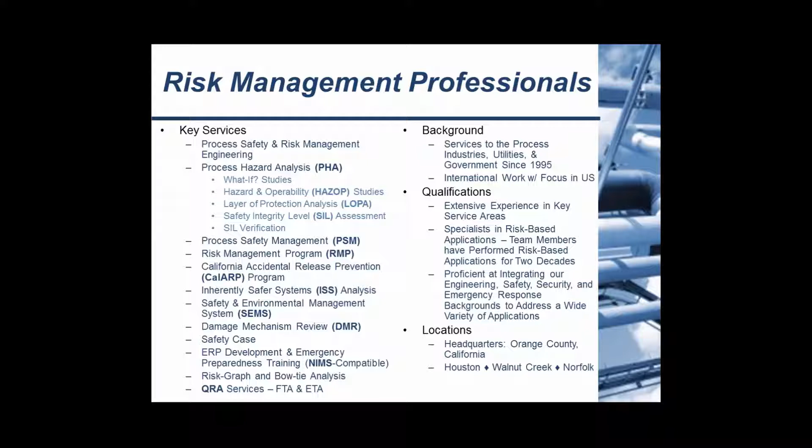Our key topics today are to discuss briefly the Program 3 element overlap, any periodic requirements that are typically required in Program 3 programs. We'll discuss the common program deficiencies that we've observed here at Risk Management Professionals that were listed in the EPA enforcement alert recently, and summarize some of the revised CalARP regulations that became effective at the beginning of the year.

If you're not aware of these changes, you could be deficient already just based on the fact that they went into effect through the year. So it is important that we listed these as potential deficiencies in this webinar. I'll also go over a regulatory update with the current status of where everything is to our knowledge, any potential changes that we foresee, just discussing with our contacts at the federal and state agencies, and any suggested facility actions for those facilities who may be concerned with what the future regulations

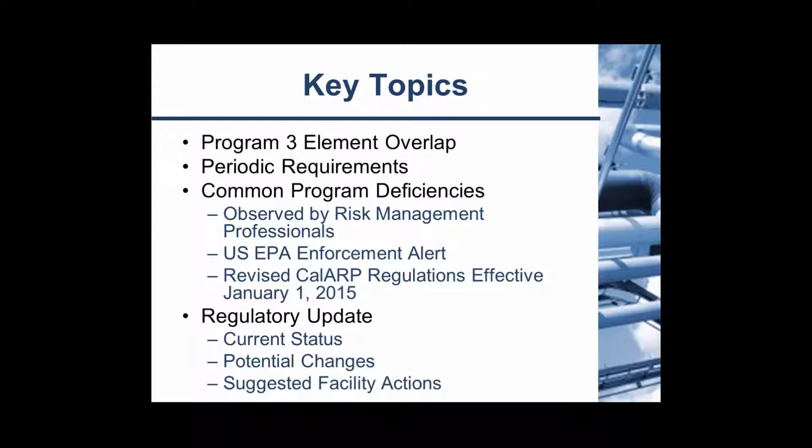hold. This slide presents the prevention program overlap. As you can see, we have 2 federal and 2 state for California programs that have regulations that overlap quite extensively. We'll discuss the more conservative regulations in California for the most part. However, with the general duty clause at the federal level, it is very likely that these would be required at the federal level as well, which is why we always cover everything.

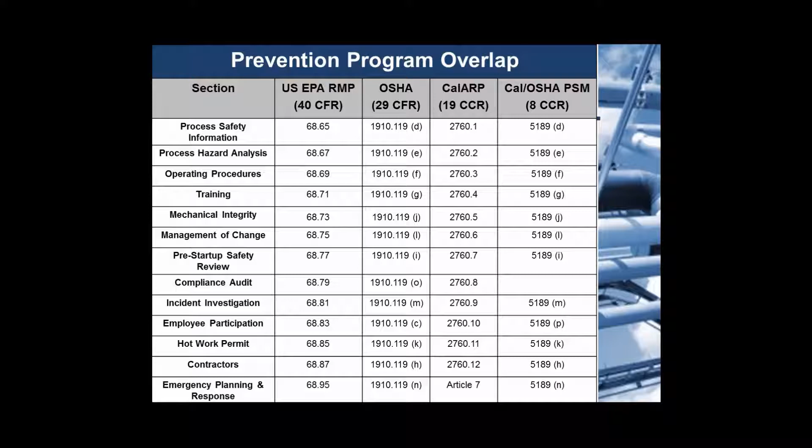For periodic requirements, there are obviously ongoing requirements whenever there's a process change. There are also annual review and update requirements for operating procedures and emergency plans. Those include the emergency action plan and the emergency response plan, depending on your facility's response measures. There's also the triennial or 3-year updates or audits, and those include the compliance audit and also refresher training for your personnel at the facility.

Every 5 years, in regulations, you're required to submit a CalARP or RMP submittal, sometimes both if you're in California. There's also the hazard assessment, or otherwise known as the off-site consequence analysis, and the process hazard analysis, or if you're a Program 2, would be the hazard review. And again, we're going to be talking about Program 3 elements today, and the seismic assessment in California.

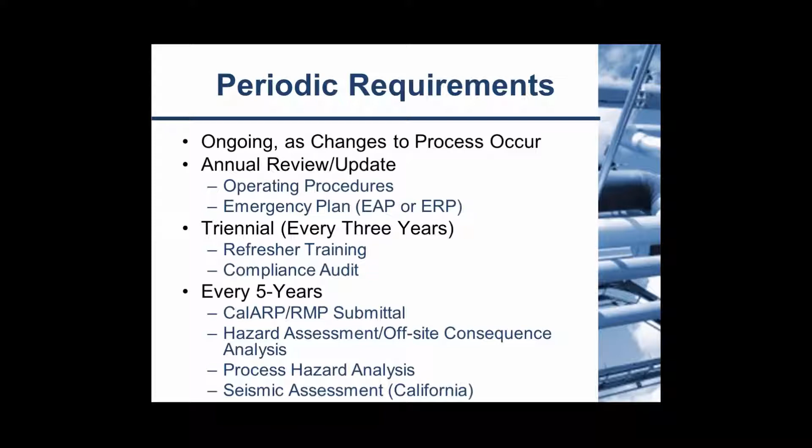So we'll move on to our common program deficiencies, and they're specific to ammonia refrigeration. Again, this list is going to include those observed by us here at Risk Management Professionals, those listed in the U.S. EPA enforcement alert that was published for February of this year, so this month, and those revised regulations that went into effect in California on January 1st.

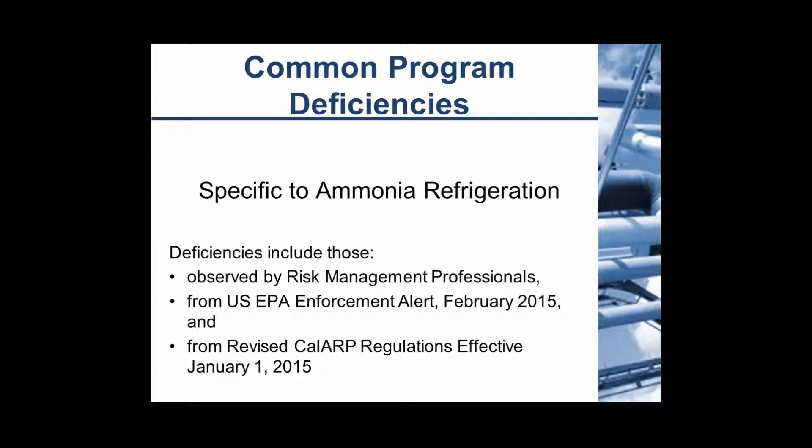So for the CalARP RMP submittal, we typically see that the submittal is either not completed or not submitted to the agency in a timely manner. And by that, we mean that it's not submitted on time by the anniversary date.

The management system is frequently not in place, and that's really important, especially if you have frequent changes to management or to personnel. There needs to be a new submittal for each change. Those changes are considered administrative changes, so they will not reflect back on your anniversary date. That will not change when you make an administrative change. However, you do need to update more frequently if you have more frequent personnel changes.

And that's important to note. The emergency responders and the EPA, OSHA, they all use this information to have facility contacts and to also know what the facility is doing. And if your information is not up to date, they won't be contacting the right person if there's any issues or concerns with the data that's submitted.

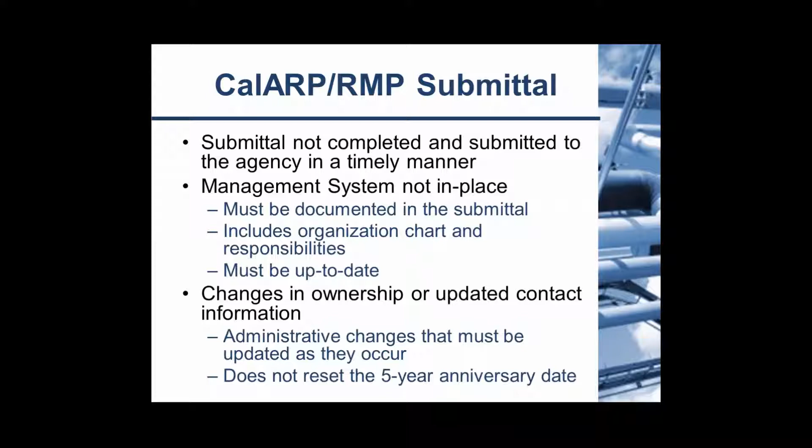For the hazard assessment, we typically see this description of the alternative release scenario that's not present. When it is present, you always need to ensure that both the worst case and alternative case scenarios meet the requirements listed in sections 2750.3 and 2750.4 of the CalARP regulations.

There's also the revalidation for the hazard assessment. Most commonly, there's a failure to update the population based on the most recent census information, which currently is the 2010 census. We also see that in California, especially the LA and Orange County region, the list of sensitive receptors and a map will not be included with the submittals, and that's really important for the region. They like to have phone numbers to call in an emergency if there's evacuation orders, to be able to warn the public. A map helps indicate who's closest to the facility and what kind of facilities are involved.

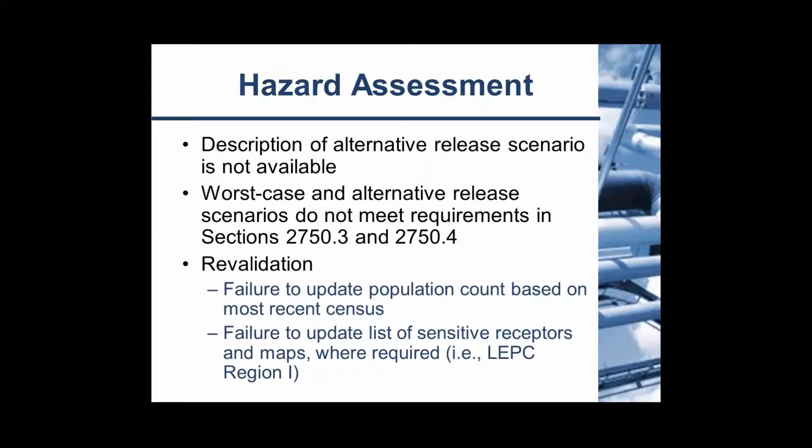For the process safety information, P&IDs are very important. If they're missing or don't reflect changes in the process, it can be very difficult to figure out what's going on at the facility. It's very important to have these updated. They also need to be updated for each PHA. So at a very minimum, even if you're not reviewing them annually like recommended and required, you should be reviewing and changing them as necessary on a 5-year cycle for the PHAs. That's something we see frequently with risk management professionals. It can be very difficult for facilities, especially with older P&IDs, but this is really important to have put together, especially if there's emergency or other hazards at the facility.

With process safety information, especially during compliance audits, we see a lack of documentation, and you'll hear this a lot this morning about documentation. It's all about documentation. Make sure that you have relief system design information in your PSI section. Make sure that you're in compliance with RAGAGEP, the Recognized and Generally Accepted Good Engineering Practices. If it's best practice in the industry, you should be doing it, even if it's not explicitly required by the regulation - it's implied by the general duty clause. You need to be paying attention to that. Make sure that the electrical area classifications and distribution system information is all listed, that chemical reactivity hazards are covered, and if any codes and standards were used during design, that those are listed as well.

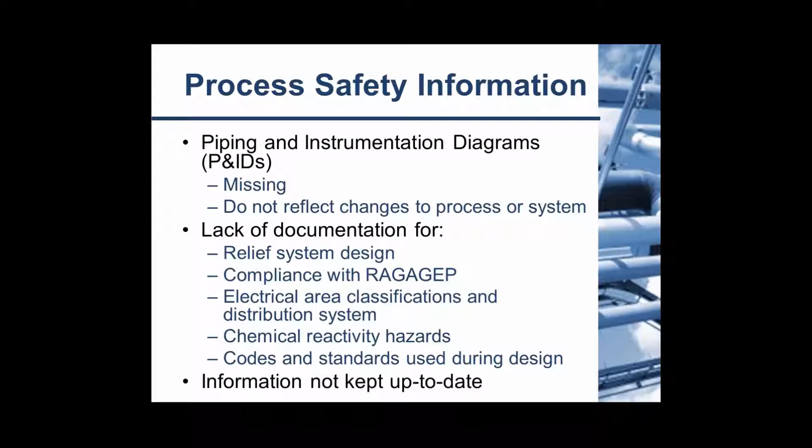For the process hazard analysis, the PHA should be conducted by a knowledgeable person in the process, or at least that person should be involved. Sometimes that's multiple people, but a knowledgeable person needs to be present who has knowledge of the hazards of the facility, possibly someone who's worked there for several years and understands the ins and outs of the operations.

You need to make sure that you're identifying your hazards properly, that there's an understanding between the codes used during design and the codes currently in place. If there's any updates or upgrades that need to be done to the system, those need to be considered and followed through with in recommendations.

You need to know the location of your emergency shut-off and evaluate that. If your emergency shut-off location is in a maintenance room, a mechanical room, or operations area, it could be in a hazardous atmosphere. If it's in the same room as, say, your ammonia tank, that could be a potential hazard, especially if you don't have people trained to go into a hazardous atmosphere. It's really important to consider installing an emergency shutoff outside of that area, possibly on your way out the door in an evacuation.

We've seen a few facilities starting to do that. I think that's becoming more common practice for the safety of their employees and reducing their liability in case there is an emergency. Also, ensure that the pressure relief devices are located where ammonia is not going to be sprayed or come in contact with people trying to evacuate or respond to an emergency. Those should all be located out of the way, possibly outside the building if you're in a building.

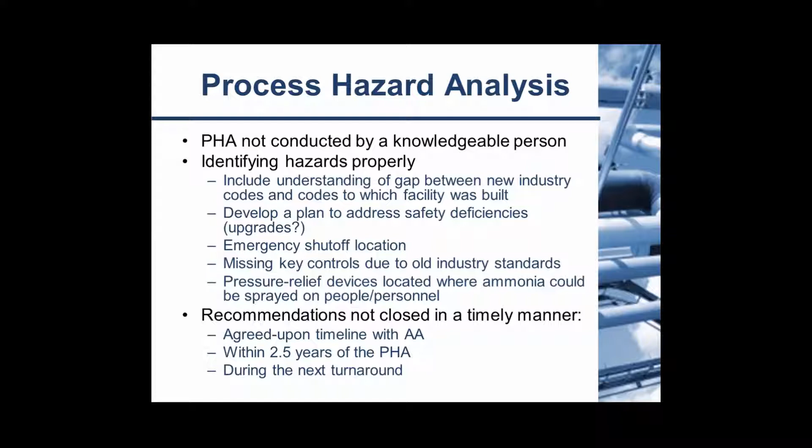Continuing on with the PHA, we sometimes see a lack of documentation for closed recommendations. Again, going back to the documentation aspect of this, if it's not in writing and it's not on file, it doesn't count whether you did it or not. It's really important to remember that. You can say you did something all you want, but if you don't have a piece of paper to prove it, the regulatory agencies are not going to accept it. So you need to keep these recommendations, whether closed or not, on file for the life of the process.

They also must include a completion date. We highly recommend also including a person who's responsible for the completion, someone who's going to follow up with the changes or upgrades that are being made.

Frequently we see that the 5-year update is not completed by the anniversary date. That's typically a scheduling issue, and it's really important to remember, especially if you use an outside consultant, that it could take up to 3 months or more to get something like this scheduled. You've got a team of people you have to get together, and everyone's busy, obviously, especially in operations. It's really important to keep in mind that just because it's due next week does not mean you could get it done by next week.

Maybe because of scheduling, maybe availability, you could have technical problems. You may need somebody, the owner, who's out of town that week and they need to be present. So you need to keep all of this in mind, and it's very frequently much easier to just plan ahead and complete it before the anniversary date, even up to a month before, and schedule it early. Then you move up your anniversary date by a little bit for the next cycle, but it's not really hurting anything and you're done on time.

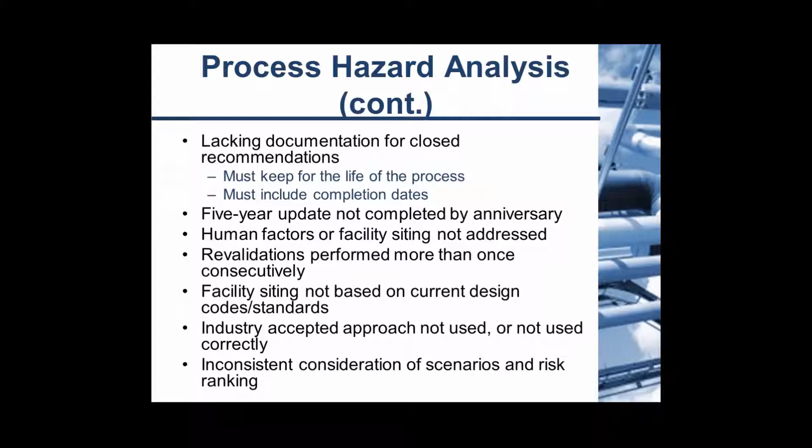Facility siting, when conducted, should be based on current design specifications and standards. You don't want to be using old codes and standards. Everything should be current to current building code or best practice through the relevant agencies. I know API releases bulletins, and there are a few other agencies out there that also give guidance on that. Also, a generally accepted, industry-accepted approach should be used, and it should be used correctly. There should be a consistent consideration between scenarios and risk ranking throughout the entire PHA for the facility.

Moving on to operating procedures. Operating procedures should not be outdated, and an annual review should be performed. This is frequently documented with a simple sign-off sheet. If there are no changes, that's great, but you still need to prove that you reviewed them annually. So something like a sheet in the same binder or on your computer, where whoever's in charge signs off saying, yes, I reviewed it on March 1st, 2015, means you're doing it and you have a piece of paper to document that.

Again, we're going back to documentation, everything needs to be written down and proven. These operating procedures also need to be synchronized with what's going on in the field with the operators. Each phase of operation should be covered, including temporary operations if there are any. Emergency shutdown job procedures should be very clear. If there are certain people responsible for different tasks, they need to be laid out very clearly in the operating procedure as well as in your emergency plan.

Acceptable alarm set point ranges should be indicated very clearly. We frequently see that missing from the documentation. Procedures should be in the language of the user. So if you have personnel that do not speak English, they need to be in that other language for them to use. This is very important - if their first language is Spanish, even if they understand English, if they can't understand the operating procedures in English, they need to be translated to Spanish. This is required by the regulation. Consequences of deviation are frequently not included in these operating procedures, and they should be on each procedure. Safe work practices should always be followed.

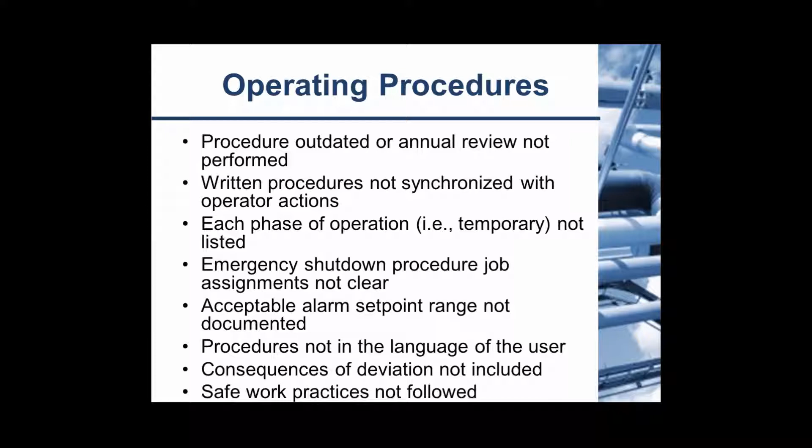For training, we frequently see that training documentation is not on file, and that doesn't mean it wasn't done, but again, we're going back to being able to prove that you did it. It could be a simple certificate or sign-in sheet from a training, quizzes that were taken, or an evaluation sheet that was done to evaluate the performance of that operator, but something needs to be kept on file that the training was conducted and how it was conducted.

It needs to cover maintenance procedures. Even if you go to an outside contractor for maintenance, there are still going to be some basic procedures for the operators to assist the maintenance personnel. It may be that they're turning valves, or just supervising, but there should be a procedure and training in place for all of that, no matter how simple it may be. Records need to verify that operators understand these procedures - going back to quizzes, oral verification or discussion and sign off, or field observation, something to verify that the operator has understood the training they've been given, and that they know what to do in the situations they've been trained for, whether emergency, regular operations,

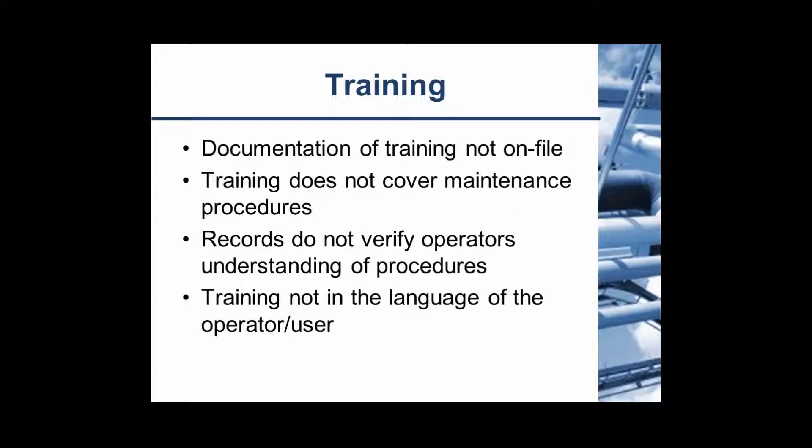temporary operations, whatnot. Again, the training needs to be in the language of the operator or user. So if you have someone with English as a second language, even if they speak English and understand it pretty well, if they don't understand their training in English, it needs to be provided in that other language. For mechanical integrity, written procedures need to be available, complete, and implemented.

We frequently see that it's not, and this goes for even when you use contractors for maintenance activities. Inspection and maintenance should be performed and documented. They need to be standardized and consistent with industry standards. Frequently in the EPA enforcement alert, they've noted pipe corrosion issues and pipe security not being addressed. They've also indicated that ice buildup has not been addressed in these maintenance procedures. So these are things to keep in mind - if you don't have procedures, or your maintenance contractor doesn't have procedures, they need to be documented.

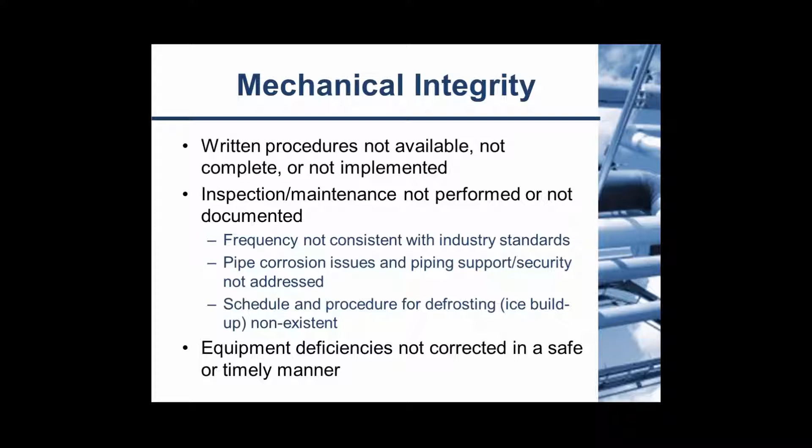Equipment deficiencies should be corrected in a safe and timely manner. If there's an upgrade that needs to be done, a process that needs to be changed, all this needs to be done within a good timeframe. The maintenance needs to be scheduled with the contractor if that's who's doing it, and it needs to be on a schedule. Again, going back to documentation and follow through. Quality assurance should be in place. There should be some kind of third check or second check on all the work, and everything should be verified that it's been conducted appropriately.

There should be sufficient information available for piping and equipment hazards, and develop a maintenance program around those. If there are certain procedures that need to be done during maintenance, or certain supervision or awareness, all that should be documented in the procedure that's in place. The facility should also verify that you have adequate ventilation during operations and at any other time that may be necessary.

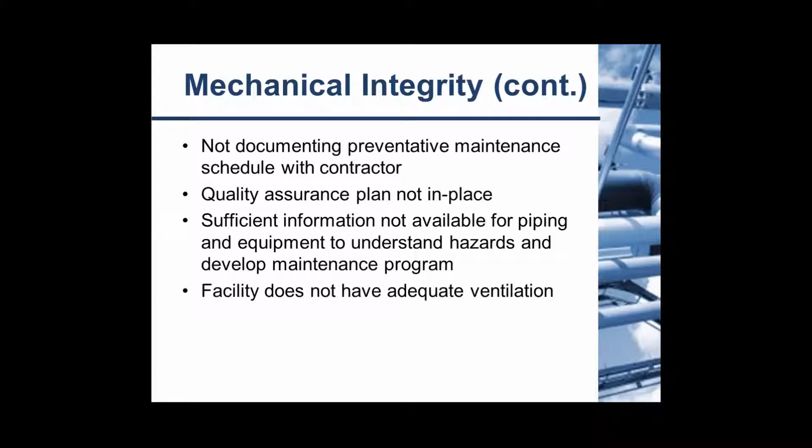For management of change, frequently this procedure is not even used. It's really important to remember that if there's any change to the process that's not a replacement in kind, you need to have a procedure documented and in practice and used. The prevention program may lead to prevention program changes and documentation changes. Again, if it's not written down and you don't document what you've done, it doesn't count. So you could still be cited for things even if you've done them and you just don't have the paperwork.

Also, if there's any personnel that need to be notified of any changes, that all needs to happen. That ties into some of the other elements such as training, maintenance, and employee participation. So all that needs to be considered when you go through an MOC process. If there's a need for modification in the operating process or maintenance, that all needs to be addressed during this period as well. While the change is occurring or while you're proposing a change, what other changes to other elements will need to take place.

And the MOC procedure should be completed before startup. So this isn't something you do after the fact when you're all done. If you have already installed the new equipment or whatever it may be, it needs to be done before that, during the planning process. That's the intent of this element.

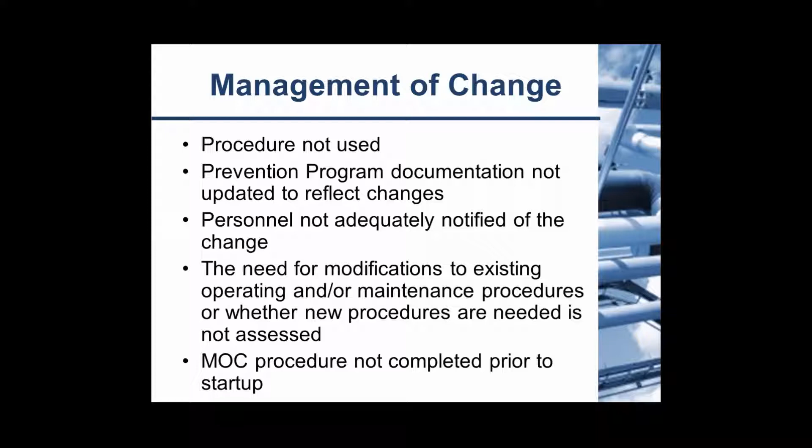The pre-startup safety review, again, the procedure is frequently not documented. There should be some kind of form or checklist or procedure in place to do the PSSR. Documentation needs to be kept on file, and when it's completed, it needs to be signed off on, and the implementation and follow-through needs to be documented.

It needs to be conducted prior to startup, but after and independent of the MOC. So this is supposed to be a back check, basic quality assurance check on the MOC process. Was everything done correctly? Was the equipment installed? Were procedures changed? Were the employees notified? Everything that needs to go into that. This is the final check before you start up the system again. It's really important to remember that and to document everything.

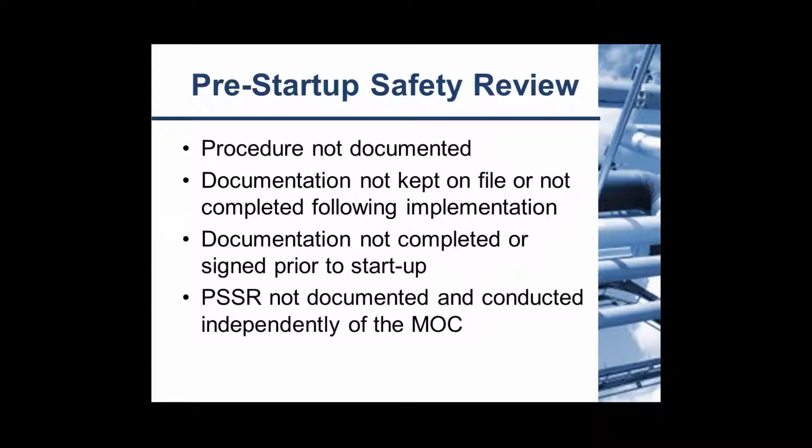For the compliance audit, recommendations now have a required timeline as well under the CalARP regulation, and frequently they are not corrected or completed on time. There's an agreed upon timeline with the administrative agency that's allowed, as well as the requirement to complete them 1.5 years following the compliance audit or during the next planned turnaround. All these apply to whatever occurs sooner. So it's important to keep that in mind, especially with changes that deal with safety.

You probably want to get them done sooner rather than later. The compliance audit should always be completed before the anniversary date. It doesn't necessarily mean the report would be completed by then, but the audit needs to be done by then, and it's implied in the regulations. However, you should really have everything done by the anniversary date if you can.

The documentation should include audit scope, methods, and findings, and this is new to the CalARP regulations. Previous to this, they only specified that findings had to be documented, and now they're requiring that you document and report the methodology that was used, how you did it, what was included. That's typical of our reports here at Risk Management Professionals, but not necessarily typical of all facilities. So it's important to remember that.

Program implementation should be verified with facility personnel. They should know where this documentation is for the entire program, and they should be able to review this compliance audit, especially, and know what the deficiencies may be. The recommendations should be documented and included in the report, and they need to be kept for the most recent 2 compliance audits at a minimum.

We highly recommend you keep them longer than that if you can, file them away somewhere, especially if it's just on your computer as an electronic file. But the most recent 2 compliance audits must be kept with the program documentation until the 3rd one or the next one would be conducted.

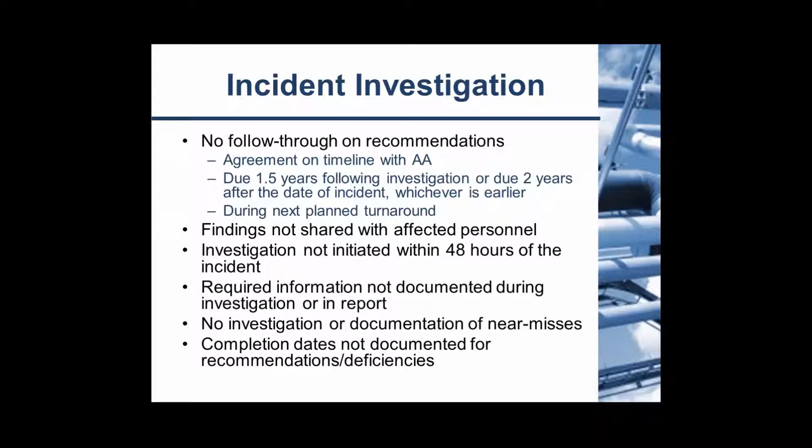For employee participation, frequently a written plan is not documented or not shared with personnel, and that goes for all these program elements. They should be fully aware of where this information is located at the facility or corporate-wide, and they should have full access to this. It's their right to have full access to their safety and what the company is doing for their safety and for operations.

Personnel involved with the process should always be aware of these programs and know where the documentation is. They should be involved with program development, especially the operators. They're frequently the people who know the most about how the system is working and any nuances. They're out in the field every day, so they know what may be underperforming—there may be a valve that's about to break, and they may be able to tell that and report back. So you want to involve them in this whole process. It's really important to get their input.

The documentation needs to be in the language of the operator or user. Going back to people who don't speak English fluently or as a first language, that all needs to be translated for them somehow, and it's really important to note that.

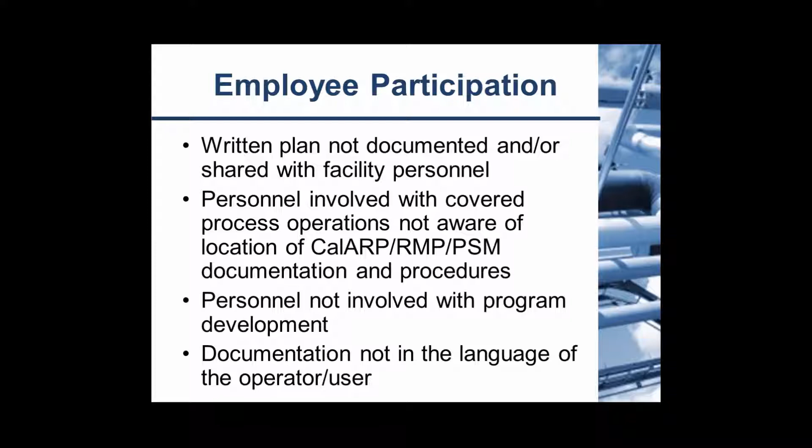For hot work permits, personnel should be trained and knowledgeable in the procedures, and they should be documented, with records always kept on file. I believe the best standard practice is to keep them on file for several years. I know a few facilities I work with directly will keep them on file for the life of the process, so it's implied that you need to keep them on file for a lengthy amount of time. It's really up to the discretion of the operator or management, but that may change as regulations develop over time. Also, the hot work area should be field verified by a supervisor.

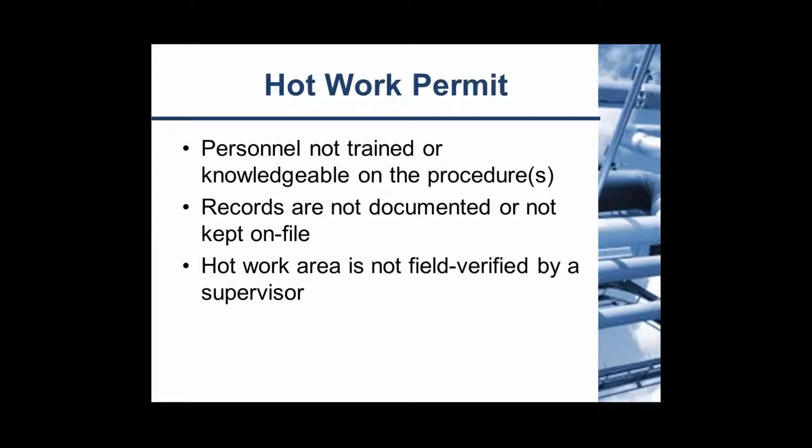For contractors, there should be documentation regarding their training, so any kind of training certificates, same as you would for your own employees, and keep those on file. It should be the same for the contractors. And it is the owner's or operator's responsibility to collect those documents.

So if the contractor's not offering them up, and let's just say they do annual training, you need to be asking for them. It's your responsibility to have those on file and to make sure that they're up to date. There's also frequently a lack of safety training. A lot of accidents happen because contractors or operators are not trained appropriately. So this is all part of the verification process and documentation.

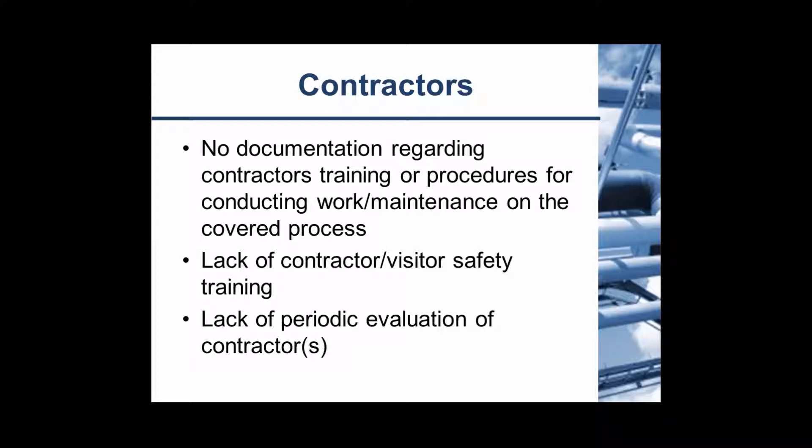And there's also a periodic evaluation of contractors that should occur. You should be evaluating them on their safe practices, field verification for checklists once a year. And if you have different contractors from the same company coming out, you should evaluate each one of them. And the contractor or the company may have their own method of doing that as well, and so it's always important to keep those lines of communication open. Emergency planning and response.

You should understand the difference between an emergency response plan and an emergency action plan. Although there's a slight difference between the two, there are some distinguishing documentation differences and requirements. So knowing the difference and having the correct plan in place are the first steps in meeting the requirements by any other agency.

So if you have any local agencies, a local fire department that require you to do more, do something different, you need to be talking with them as well because they may be assisting you with any kind of accident or emergency response, and you need to have open lines of communication with them. The contact information should always be up to date in these plans. If there's a personnel change, that should mean a change to emergency plan.

There's an annual review that should be done. Again, a real easy sign-off sheet that it was conducted, one of the attachments or whatnot. It's very effective to just document that you've reviewed it, there were changes, and they were made, or there were no changes. And also training on the emergency plan is really important.

If you have an evacuation plan but no one knows where to meet and evacuate to, it does nobody any good. So it's really important to train and to coordinate with local agencies, the local fire department, the local hazmat team, whoever it is that you need to be coordinating with. And that should be documented as well.

That is a new CalARP requirement to document the coordination between the groups. Again, it could be an email saying, hey, we're so glad you came over the other day or whatnot, and a little signed report or whatever it may be, but it does need to be in writing somewhere.

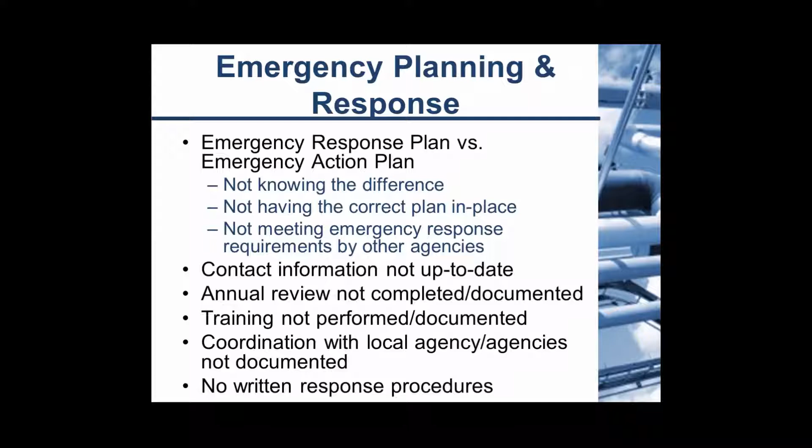So the most common program-wide deficiency that we saw here in the list was the recommendation follow-up. To elaborate on that, one of the easiest things to do is assign an individual for recommendation completion. And there should always be an anticipated date of completion that follows the regulatory compliance and also that's been verified with the administrative agency or with the local CUPA that they agree with the timeline of these anticipated dates. It's really important to make sure you're coordinating with your local agencies, with the people that will be responding to your facility, and with the people that are governing your facility.

Documentation should address recommendations when they are closed. They should be labeled as such and the date they were closed. And again, the responsible person or the individual should always be listed on that somewhere.

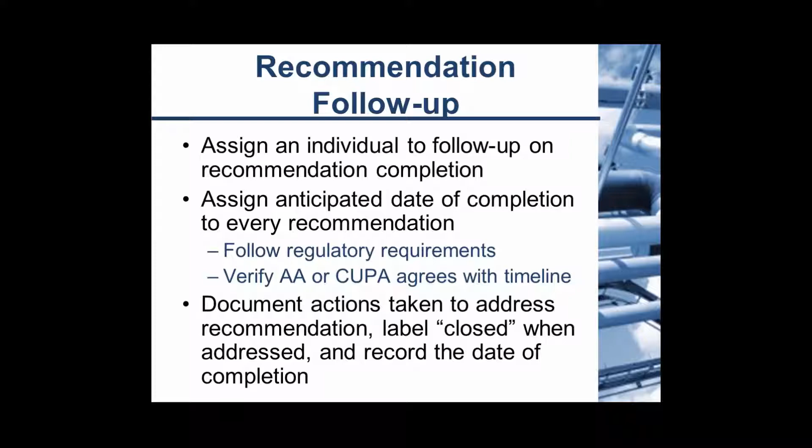And so the underlying theme here today was basically no documentation means that there's a deficiency. If it's not in writing, I always think of it as, if it was a legal matter, if it's not in writing, it doesn't count. You need to be able to defend with concrete evidence that you've been doing what you're supposed to be doing according to regulations. Even if that's a little bit of an overload of paperwork, or you print out an extra email that was sent, or you have to write up a memo and put that in the file.

That little bit of extra effort will save you a lot of effort later when an agency comes to your site, your facility, and asks for your documentation. If you're missing it, you start seeing citations, or they offer recommendations, and you've got to go back and do it again, going backwards in time to remember what happened and reproduce the document. So it's always easier to do it in the time and in the fact rather than after the fact.

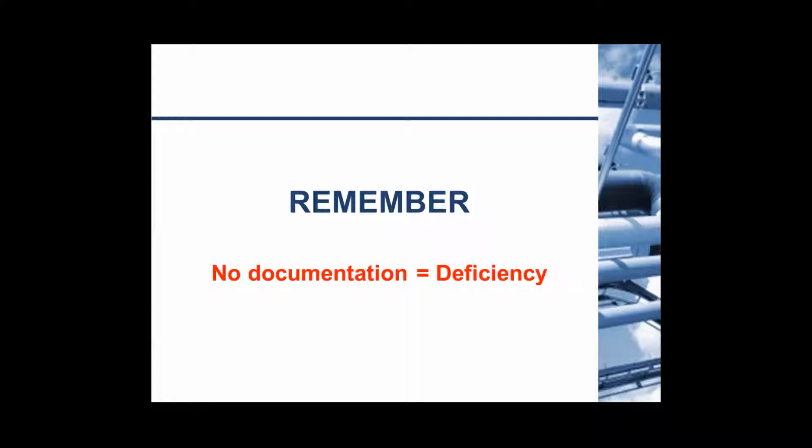So we'll go ahead and talk about the regulatory updates that are occurring federally and statewide in California. Right now, the current modernization efforts include 6 agencies that are all working together. Some, as you can see from the diagram, are federal, some are state agencies. Some are just the interagency working group and the chemical safety board, which are kind of outside of that as almost private agencies, even though they do have public influence.

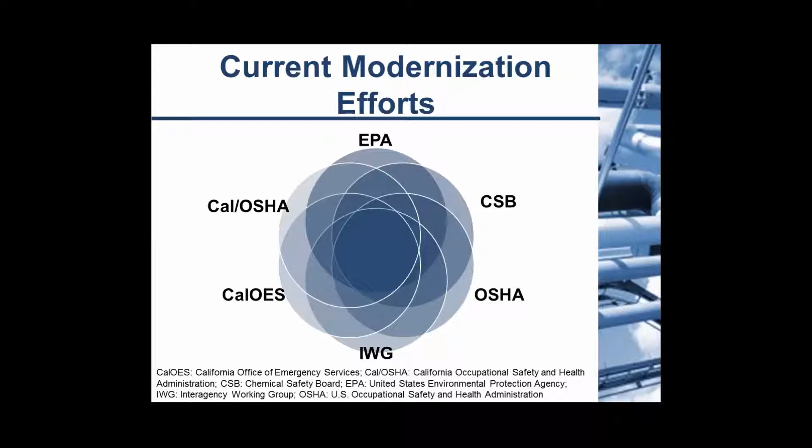So right now with the agencies, the CSB just had a hearing on January 28th. The final report was voted on unanimously and published. It had key findings that were both previously listed in the draft as well as new findings that were not. So I encourage everyone to read or at least skim this if they have the time to do so.

The interagency working group still has meetings that are continuing. There are no additional reports planned for the agency, but that could always change. And the U.S. EPA and the federal OSHA have both received all their RFI comments. They've been closed, and they're still reviewing and producing a draft report on them.

So as far as the regulations go, right now we're looking at 3 initiatives between OSHA, EPA, and CalOSHA. OSHA has 3 independent initiatives, EPA has 9 independent initiatives, and CalOSHA has 12 independent initiatives. And what this means is that those initiatives do not overlap with any of the other 2 programs or agencies and what they want done.

So for PSM, there are potentially 15 more initiatives or elements that could require facilities to meet, as well as 9 EPA or RMP requirements. For the CalOSHA PSM, basically what they're doing is they're setting up a new regulation. It'll be 8 CCR 5189.1 for highly hazardous materials and petroleum facilities.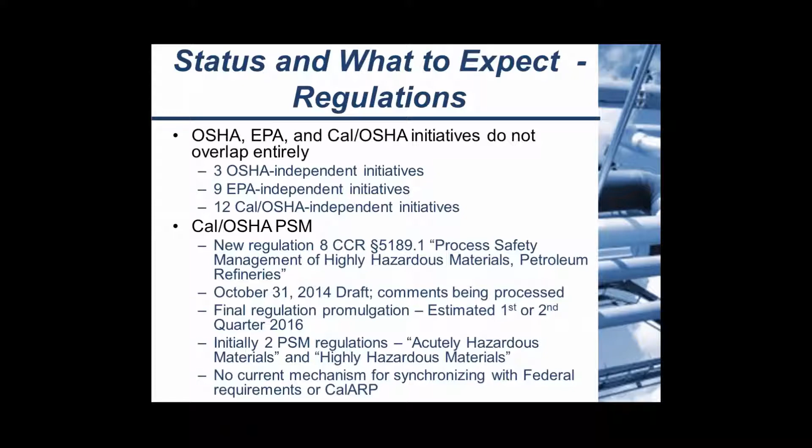There will be initially 2 PSM requirements. Again, they're the acutely hazardous materials, which is what ammonia facilities currently fall under. And then there will be the highly hazardous materials, which are typically what their categories are refineries in. But again, it's important to note that these could overlap at some point, and general duty clause could make it a requirement that ammonia facilities meet these requirements for what they're saying are for refineries. And there's no current mechanism right now to synchronize the CalARP regulations with the federal regulations.

For the CalARP regulations recently, again, we talked about the January 1st update that the new regulations went in place. There's an amendment document and the new full text of the regulations available on the CalOES website. You'll see in a slide or 2, I do have a references page that has the link to that page. There's an additional update they're seeing as needed to address the initiatives by CalOSHA.

So they're going to try to synchronize with the PSM regulations. There's a draft of an additional update that they're anticipating for spring of this year, so we're right into it. We'll be checking on more. We have another webinar in a couple months where we'll probably report back on that.

And they're likely going to promulgate this regulation after the CalOSHA PSM. They're planning one regulation with additional requirements for the high hazard facilities, but there's also no indication that they're going to try to synchronize with federal or CalOSHA.

So summarizing the last two slides, ammonia facilities under the general duty clause, if required to meet all these regulations, there could be 4 regulations on the federal and state levels in California you could be required to meet, with additional initiatives and elements. It's really important to stay on top of this because things could change very rapidly.